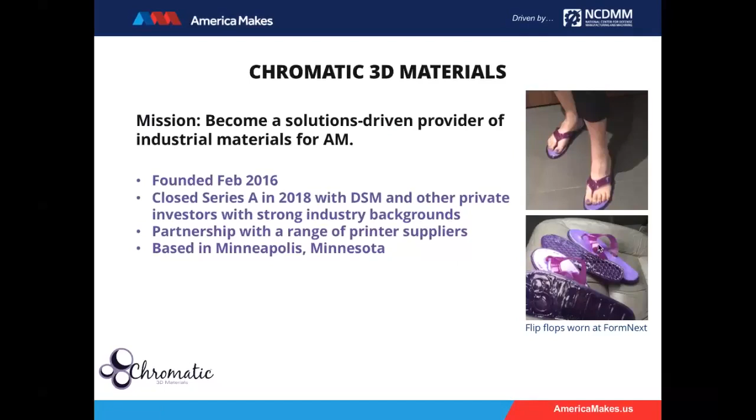We do not make printers, but we have partnerships with a range of printer suppliers, and we're based in Minneapolis, Minnesota. Just to give you a little teaser of some of the things that we can do, on the right you see a photo of some flip-flops that we wore at Formnext just a month ago. These flip-flops were printed with our materials. They are flexible, they're durable. I wore them throughout the conference, and they really have the durability necessary for robust industrial applications, as well as applications like footwear where there's really a demanding mechanical stress that's put on the materials.

So what we're setting out to try to address is what we can call yesterday's 3D printing. And for a variety of reasons, 3D printing has, over the last 20 years, had a lot of brittle materials and a lot of broken parts.

When you look at this from a material science standpoint, there are a couple of reasons for it. One is that the printers themselves are very limited in the number of materials they can handle, so you have a very limited material set with limited materials properties. But also, the manner of printing leads to parts that are more inclined to break, because many printing processes, not all of them, end up leaving voids and gaps in the materials. And these themselves can lead to very brittle, broken parts that impact durability.

So we really wanted to look at this question of how do we make parts that can stand up to the kinds of industrial requirements for standard applications that demand durable materials and durable parts.

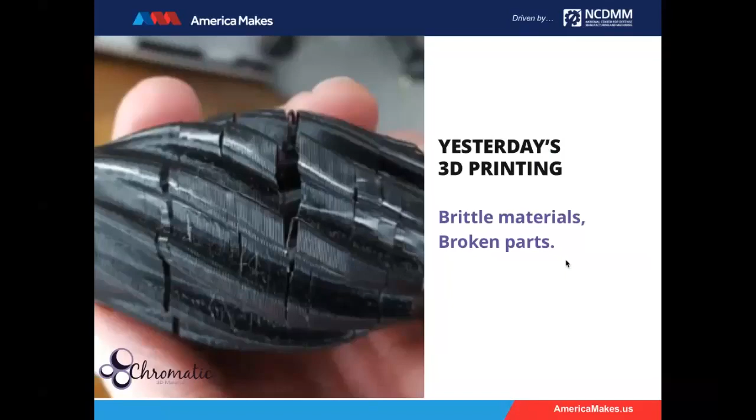So for the older people in the audience, you'll recognize this famous career advice where in the movie The Graduate, Dustin Hoffman is told that he should pursue a career in plastics. And I think this speaks to a lot of things.

First of all, the fact that the plastics industry has a lot of learnings that we can benefit from in the 3D printing industry. It's been around for almost a century now. And really, I followed this advice of following a career in plastics, and it's given me a perspective on why certain materials are chosen for certain applications.

After looking at the 3D printing industry, my conclusion was that this is an industry that really needed a class of materials called thermosets. So the title of the seminar today is about a new class of durable materials. It's a new class to 3D printing, but it's an old class for the materials industry. And that class is thermosets.

So what are thermosets? If you look at any given plastic material that is made, more than 20% of the materials you see are made of thermosets. It's about a $160 billion market in the plastics material sales world. And they're generally selected because they're some of the most durable, most flexible, and most heat-resistant materials. I'll get into a little bit of the reasons for why that is.

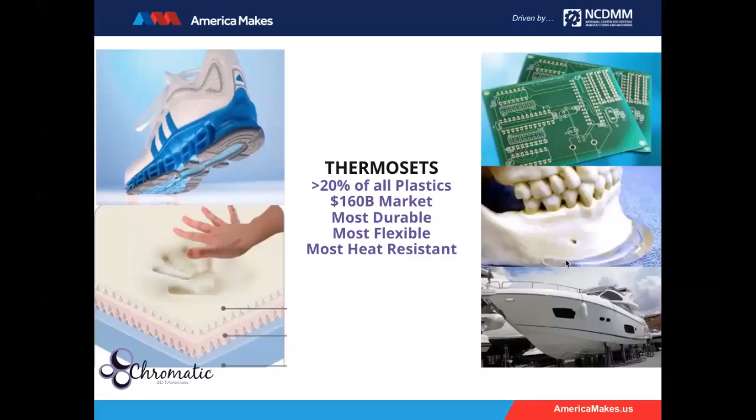But where you find them are in footwear, for one. You find them in foams, in your beds, your mattresses, your seating in your car. You find them on boats. You find them in medical devices, and you find them in electronics. All of these places demand the heat resistance and the durability that a thermoset can offer. And they represent a real broad range of properties as well.

So what are some of the differences, and how are we defining thermosets today? Plastics melt, and the melt flow sets the processing. So you start with a pellet, and you might form a filament, and the filament has a certain property about when it melts and has a certain viscosity, and that really sets its processing from the get-go.

But thermosets actually have a much broader range of properties. And what typically sets the processing rate is the cure rate, so there's chemistry that happens. A typical place where you might see a thermoset is this example on the right.

We have a cartridge dispenser of epoxy, where you have two components that are fed through a mixing nozzle, and that action of mixing causes them to react. What the designers of these materials need to take into account is how fast that reaction is going to happen, and that typically sets the processing parameters.

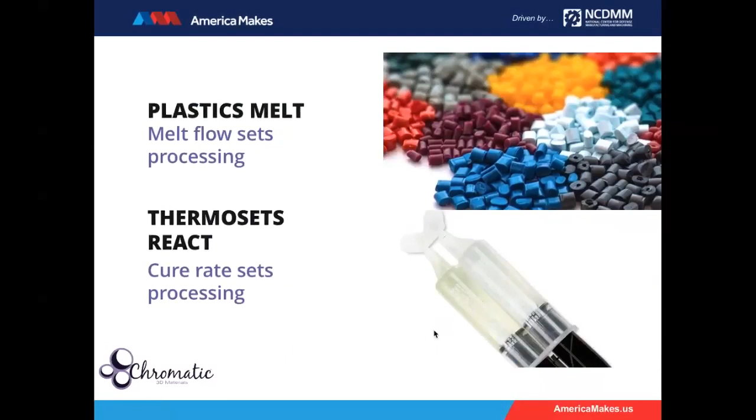Now, photochemistry is a subset of thermosets where light brings that reaction along. But in our case, we're largely focused on materials where simply the act of mixing, sometimes with added temperature, will make that reaction occur.

So let's look a little bit more at how thermosets fit into the traditional plastics market. The reason why this is important to understand from a 3D printing perspective is that as we are trying to bring 3D printing into the industrial market space, our goal should be to understand what materials our customers are using, and how can we offer them the same kinds of materials, the same kinds of options that they use on a daily basis.

So if you look at the plastics market overall, like I mentioned, thermosets, shown here in gray, can be durable, flexible, and rigid, and they're about 21% of the market. Olefins are typically more disposable and comprise about 66% of the market, but they also bring a lot of toughness and very good properties. And then engineering plastics over here on the left comprise rigid materials and materials like nylon, Ultem, acrylics, and TPU.

Now, if you look at today's 3D printing plastics and the palette of materials our customers are used to, 3D printing plastics have barely scratched the surface of the material versatility that our customers are accustomed to. Until this pie is filled out with materials, we won't be able to offer our customers the same properties they expect.

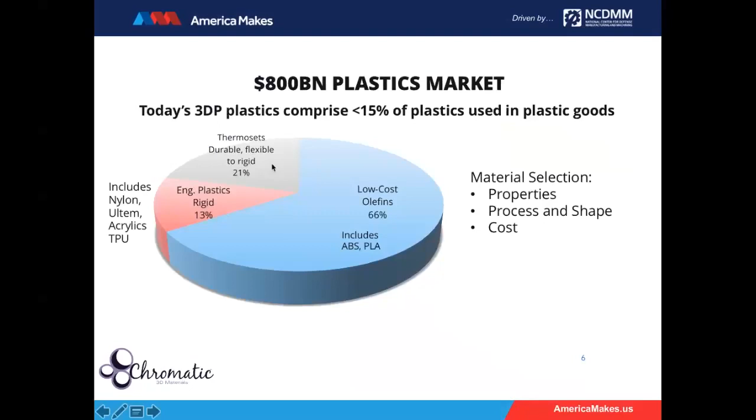So we are simply working on this thermoset material set and looking at how we can deliver this to the industrial market space.

Now, we will focus today on flexible, durable materials. Certainly, thermosets are not confined to flexibles - they can definitely go rigid. But let's take a step back and look at what it takes to make a flexible material.

So I've drawn a cartoon here on the right to show, on the molecular scale, what a flexible material looks like. First of all, they have a rubbery matrix, represented by these gray lines. These are long molecules stringing from one junction point to the next, but they have to be very flexible at the temperature where you want the flexibility.

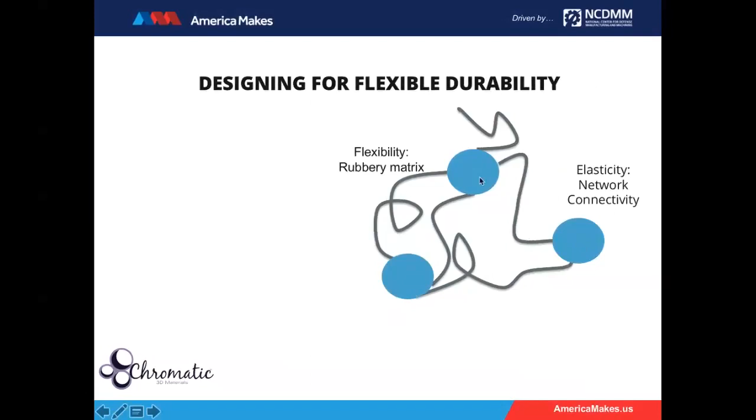The other attribute is that you want some level of elasticity. In other words, if you have a flexible material, you need to be able to bend it and have it come back without a lot of creep. In order to do that, you bring network connectivity - you need some way to bolt those flexible chains down, represented by these blue circles.

And then finally, we want durability. Durability is brought about by how strong those blue circles are, and that depends on junction size. It depends on the strength of the materials that make up the hard segments and the mobility of those hard segments.

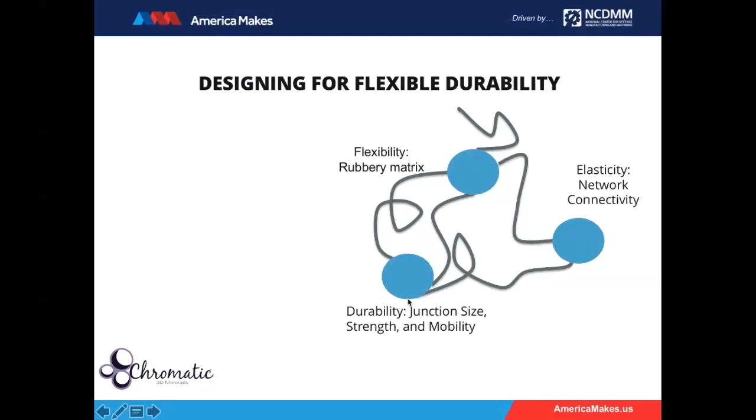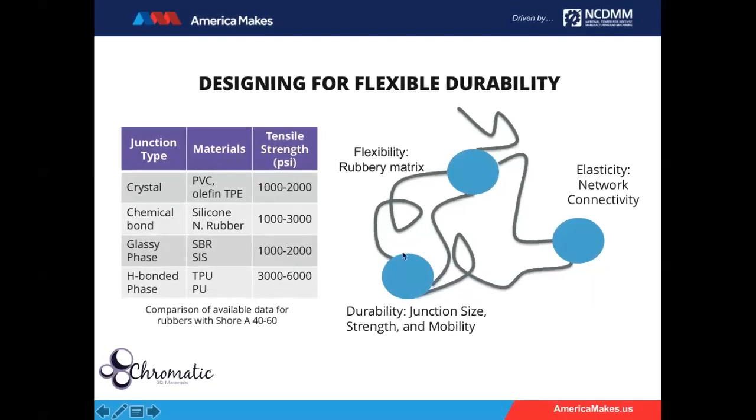So in polyurethanes, they're basically built by having a collection of isocyanates and alcohols that are combined and cured with a little bit of catalyst, and what is formed are these polyurethane networks. You have strong hydrogen bonding wherever one of these isocyanates reacts with a shorter alcohol. That's how you design the materials.

An important thing with polyurethanes is that you'll never find a single clear property for them because they are so versatile. You can change these isocyanates, their reactivity, how UV stable they are. You can change these alcohols to be more or less flexible, more or less susceptible to hydrolysis, and you can change how fast all of these components react with each other. You can also change molecular weights of these respective species. This is why polyurethanes and thermosets generally allow you to access a broad range of materials.

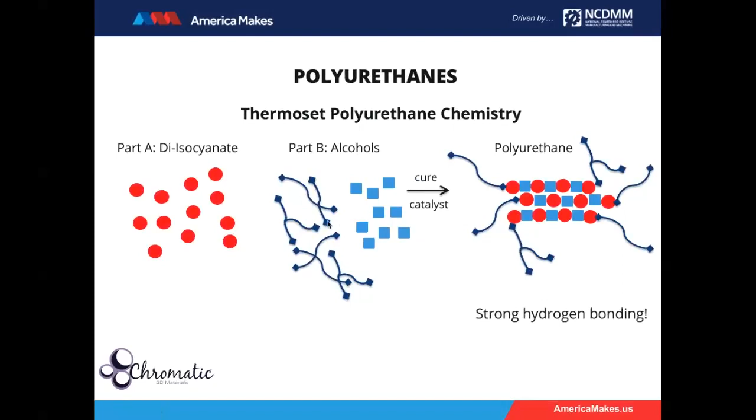So what we're doing at Chromatic is a novel technology that's really just a modification of FDM. What we have is a mixing print head. If you look at this printer here, this happens to be a Hyrel printer.

You have one of those two-component cartridges like we showed for the super glue. A two-component cartridge that holds liquid, and I think that's an important element here—it holds liquid, not a filament. So you have liquid components that feed through a mixing print head, and right here we have a static mixer.

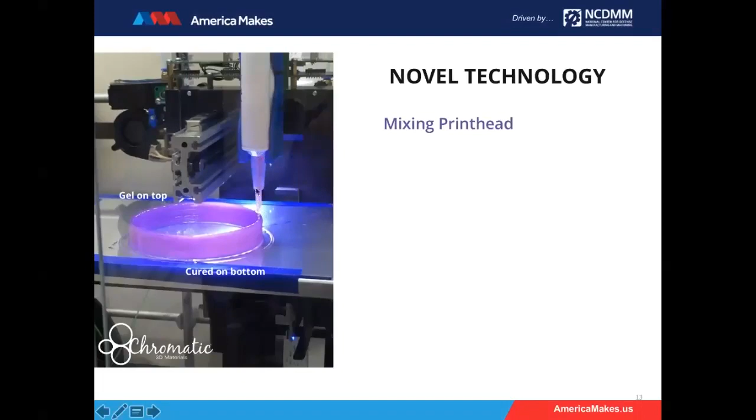That static mixer is about 2 inches long, and in it, as the two components flow through, they start to react. So we have those liquid feeds moving through. The reaction starts in this tip, but by the time it comes out, it's only partially reacted, and the reaction finishes in the part.

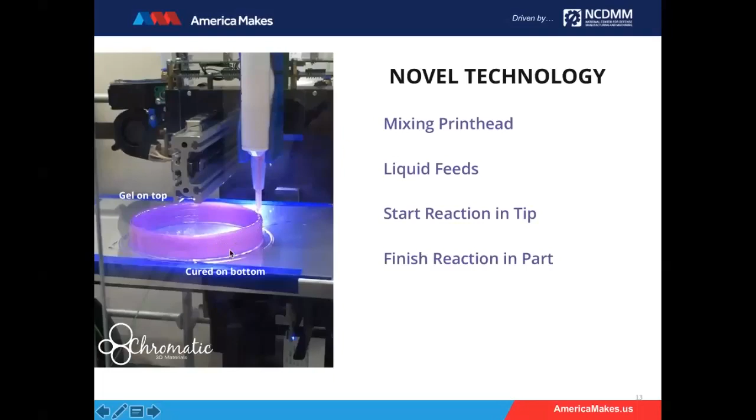If you look at this part that's drawn here, we have a gel on top that's partially reacted, while all the way at the bottom it's more completely reacted. This brings a lot of very important attributes to 3D printing. The first and most important element is that the parts are chemically bonded throughout. It's like we're printing with Gorilla Glue, because as we're laying down each layer, it's chemically bonding to the layer below.

Furthermore, because the material isn't completely reacted when it comes out, it's able to react with the material side by side, and it can also flow slightly to fill any voids that could form in a standard FDM process. The result is that we're able to make printed parts with properties comparable to those of conventional thermosets.

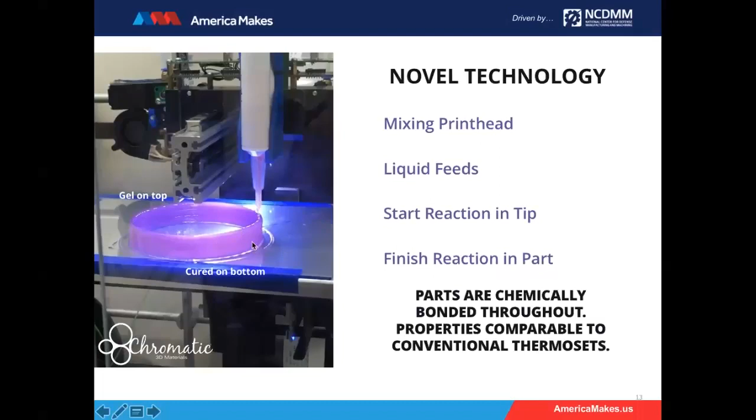The kinds of things we can vary with this are how viscous the material is, how much of a gel it is when it comes out, and how much it's able to react and flow with the materials around it as it comes down to the printing substrate.

So what is special about what we do? If you were to take a standard polyurethane elastomer and place it in these same pieces of equipment, you'll get just a blob. But if we print with our materials, we really customize the viscosity, the cure rate, and the chemistry so that we get a very solid part as it's printing. So we can get well-formed definition that you'd expect from 3D printing.

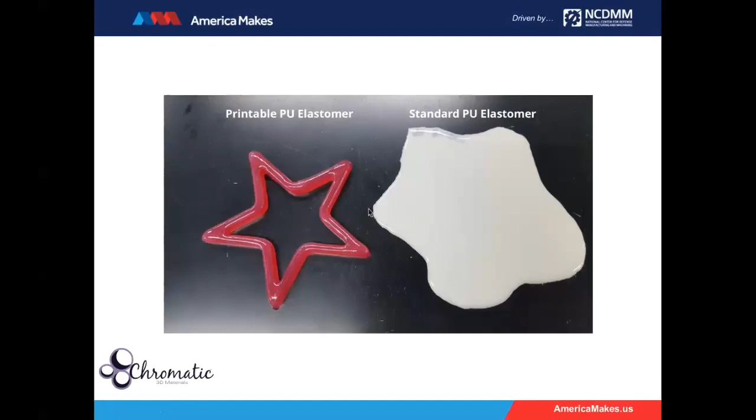Just a little more about how we control printability—it's really not that different from what you see with a filament. If you think about a filament, when it melts the viscosity drops. You have a printing processing window of viscosity where that printing happens, and then as it cools, it hardens to form the shape. This is basically what's happening in FDM.

We know we can adjust the performance of that printing resin by adjusting the temperature of the print head, and we can also adjust the temperature of the print bed. This combination of dials allows us to alter the performance and quality of our print.

With reactive liquid additive manufacturing, we have some different dials, but they affect the same thing. A thermoset starts as a liquid, so it actually starts at a low viscosity, and then as the reaction occurs, the viscosity climbs. This is what we seek to manipulate in order to get the quality of 3D print that we've come to expect of FDM. Now what we do is match the print head design.

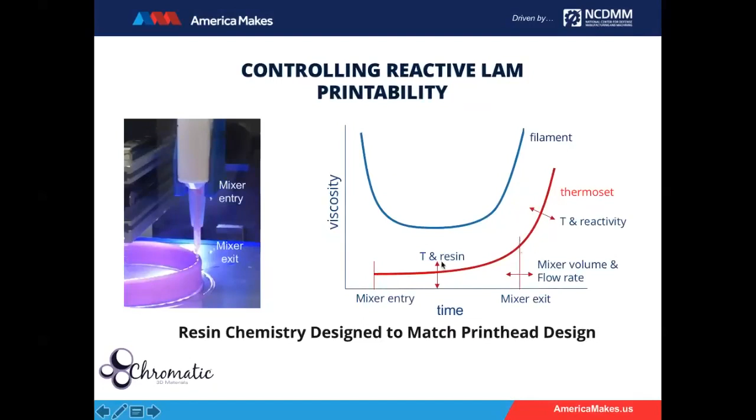So if you think about the viscosity that you might have when the material enters the mixer, and then the viscosity at the point that it exits, where it's just starting its reaction, what we can adjust is the resin chemistry to change how fast that viscosity increases. We can also use temperature, we can use catalyst, and we can also change the size of that mixer volume.

And then when it solidifies onto the part, we can also adjust its performance there with the temperature again, as well as the reactivity. And so what we specialize in at Chromatic 3D Materials is how to design that resin chemistry to match the print head design to get the ultimate performance that's required in the application.

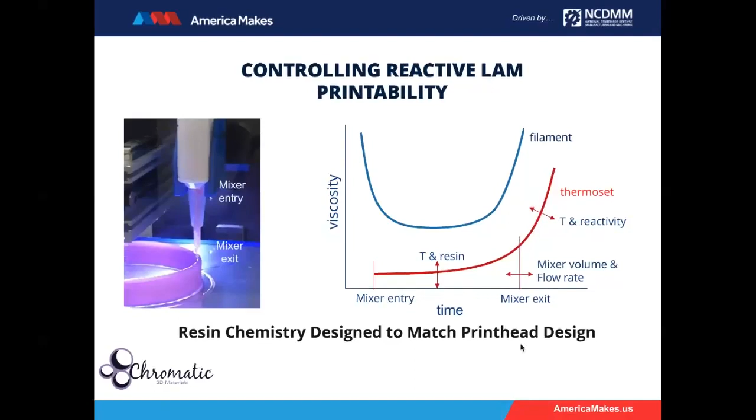Now here, I'm going to show you some of the results that we can get with this. So this is a very simple 3-layer print. It's about a Shore A of 65, so it's pretty flexible, but it's also really strong.

So we've been able to get that same effect, get the same properties that we expect of a polyurethane, where it's flexible, but you can just keep stretching it over and over again. And these materials, these rings will just return right back to their original dimensions after the stress. So we can stress it over and over again, and because we've got that great hydrogen bonding, because we've got great chemical bonds just holding that part together, it's a part that is strong.

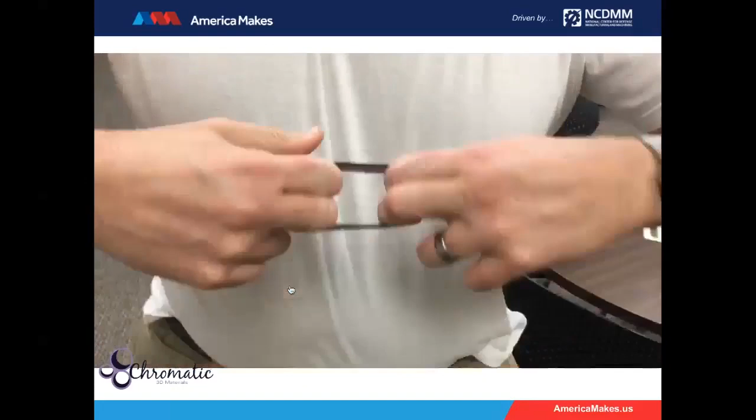And unfortunately, you can't see Dan's face as he stretches these, but he's definitely grimacing and working pretty hard to try to break that piece, and it's a tall task. But it was, as you could see, it was a very thin, flexible piece with strength that was printed.

Now, if you just zoom in a little bit more and look at the parts, you'll also see that if you just compare here on the left, FDM of PLA, you can still see the residual lines. This is an IR spectroscopy through a slice. So you can still see the layer boundaries. And as many people who are experienced with FDM will know, it's very difficult to print with FDM in a way that gets less than 5% porosity.

Now, if you contrast that with the right, what we're able to achieve are no visible layer boundaries and 0% porosity. We've been able to measure the porosity of the parts.

And the reason why this is important when it comes to durability is that voids, and those small voids that we leave behind if the materials don't form a solid part, are actually crack initiators. And so with FDM, even with the most durable resin, if we are leaving voids behind, if we have that porosity, we're making a part that is going to have a greater tendency to form cracks and be less durable.

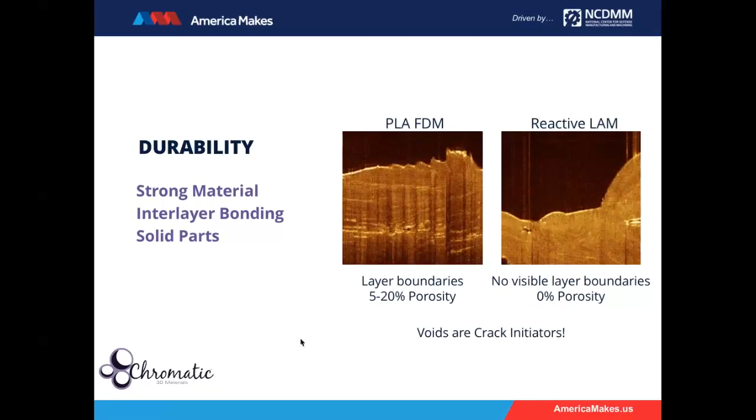Now, like we talked before, there's also a great deal of material versatility. And this brings another element of interesting traits that we can bring to bear in 3D printing. So we can adjust these alcohols and isocyanates and their length in order to vary properties like flexibility. And we can also use conventional low-cost industrial raw materials to do it. So we have the potential of having low-cost materials.

But very importantly, with thermosets, unlike thermoplastics, you can blend two materials in order to achieve intermediate properties. This is very distinct from thermoplastics. If you blend PLA and polystyrene, you don't usually get a material with properties in between the two. If anything, they're usually much, much worse. With a thermoset, when you blend them, you actually get intermediate properties.

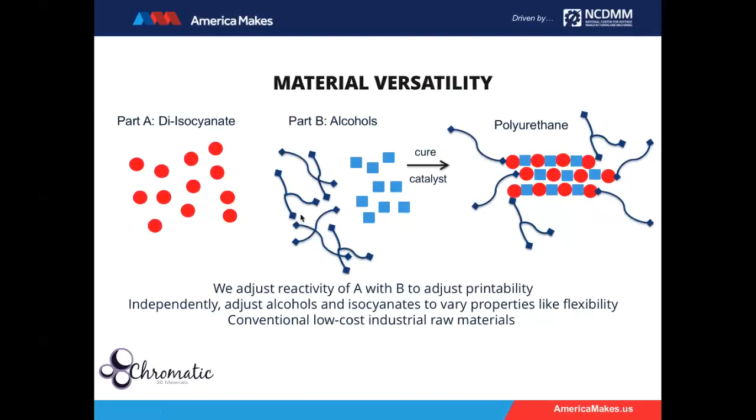So what this means is that in the print head, we can actually adjust the material that we are printing. And so we have won a National Science Foundation grant in order to develop what we call algorithmic materials. So you can get a spectrum of properties and really multi-material parts, also with the durability of the polyurethane.

So just like when you go to the paint store and you're faced with 10,000 paint colors to choose from, and that's coming out of just a very simple system with a limited number of ingredients, we're going to be able to do that in the print head as well and really bring a variety of properties that can adjust on the fly as we print. And that could be color, that could be flexibility, it could be a number of different properties.

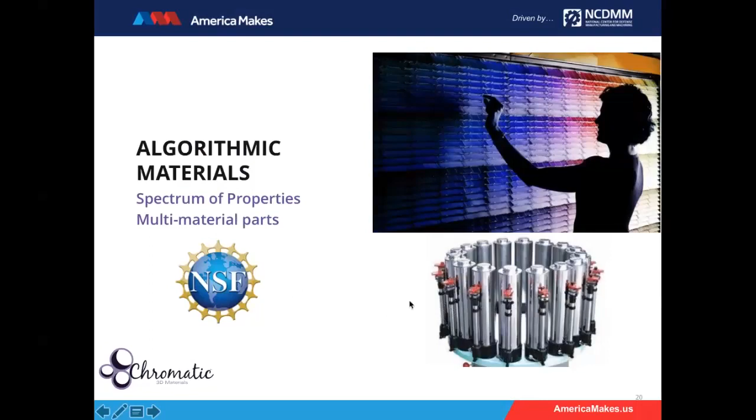So some examples of what we've been able to do here: we have a multi-material star with a soft exterior and a hard center, and it's a fully bonded part so that you cannot pry the two pieces apart.

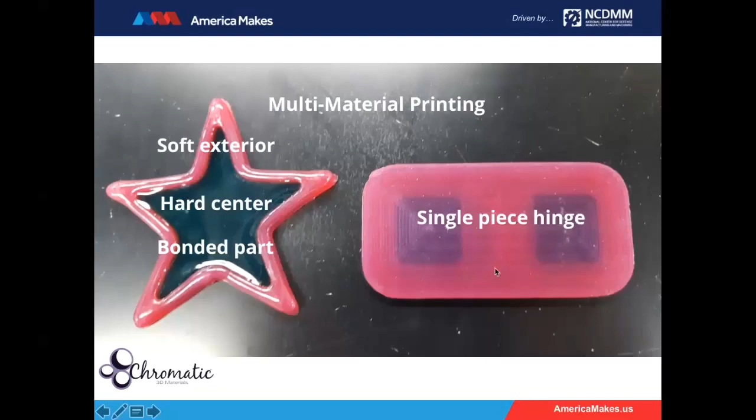We also have a demonstration of a single piece hinge. Here, the dark purple areas are a harder durometer than these pink areas that are softer durometer. That means you're able to print a part that is more likely to flex right in the center, and we can imagine part designs where we're able to reduce fasteners.

This can take 3D printing and industrial applications of 3D printing to a whole other level, where we're able to influence not only geometry design of our parts, but also material design, bringing the strength exactly where you need it and the flexibility exactly where you need it.

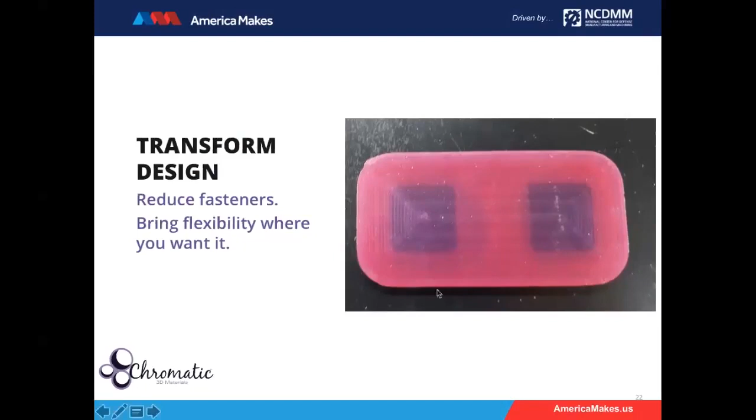Taking this a little further, as I mentioned at the opening, thermosets and polyurethanes could be used to make foams. This is an example where we've got a printed elastomer base with an embedded foam. Here's an example of what that can look like and what kind of design that can make.

So we have a very flexible part, and the foam feels quite soft and comfortable, yet when we pound on it, it's still very strong because that elastomeric network can provide support. This is being able to integrate parts in a way that could only be done with some of the most complex injection molding technology, now brought to bear in 3D printing.

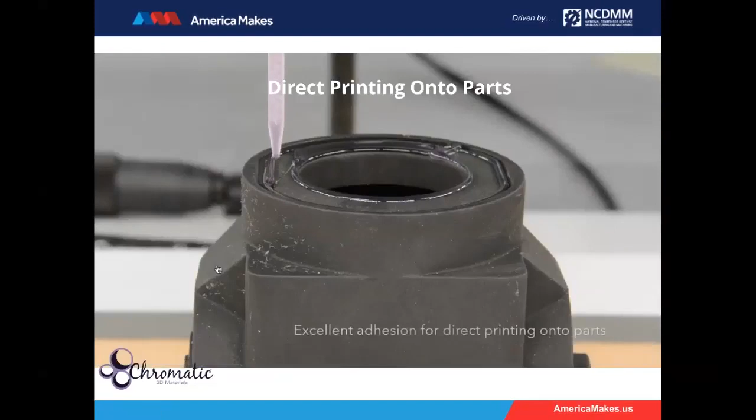Taking this further, another element we can do is directly print onto parts. This becomes important because of two attributes: one is the adhesion of the reacting material allows it to adhere strongly to metal substrates and other plastic substrates, and an important element is that the printing can happen at room temperature.

In this video, we're printing onto an ABS printed part, but because the printing happens at room temperature, we're able to add this elastomeric gasket to the part without fear of melting the ABS. But this could also be done on a metal part.

I believe that this flexibility of the printing method allows you to really open up new designs. You don't need to worry about how to bring these parts into the printer.

So just to summarize our capabilities: we can extend the class of thermosets—we've talked mostly today about polyurethanes, but these same philosophies and design approaches can be used with silicones, epoxies, and foams, and the liquid delivery just brings a lot of versatility to the table.

It brings the ability to bring color, it brings the ability to integrate inorganic fillers. There's just a lot of technology that can be brought to bear to bring material versatility.

I think the material versatility is a hugely important element for our customers, because the industrial users of 3D printing are accustomed to having a selection that is cost-effective but also meets the needs of their particular applications.

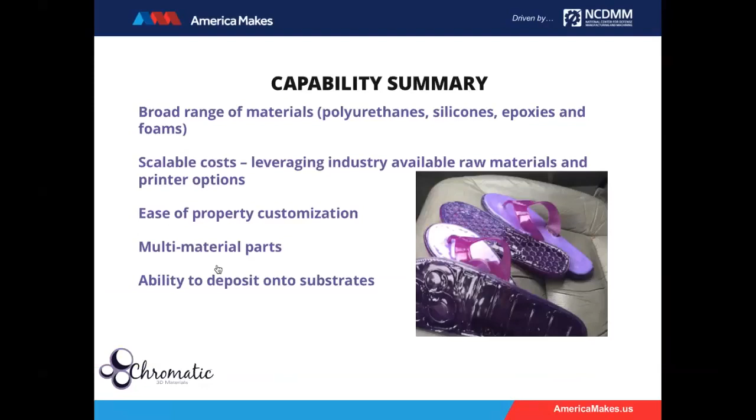So what are some of these printers that we're working with? Well, the list of printers that we are working with is growing steadily.

We've mentioned the Hyrel printer, the German RepRap printer. Structur3D also has a printer where the print head is an attachment on an Ultimaker machine. But also Collider has an interesting printer where you can SLA print a shell and inject a polyurethane.

So we are partnering with these printer companies in order to provide the software and the materials to meet the manufacturer requirements, whatever they may be.

Okay, I see this question about voids initiating cracks. I think I'll address that towards the end, if you don't mind, and I'll talk about that a little bit more.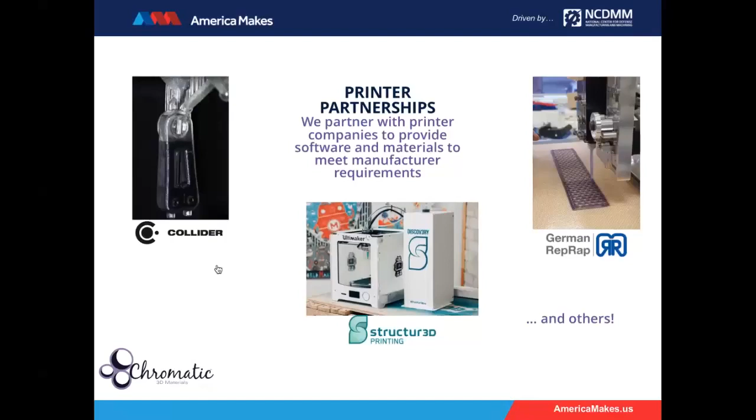By collaborating with these printer companies, we're able to tune our resins to match the capabilities of the printers, but also to meet the needs of our customers, whether they need a smaller print, a higher detail print, or whatever their application requires.

So how are we going about building our business? Really, because we're a small company, we're looking for near-term opportunities. We see huge potential for what we can do with this technology, but we need to take the first steps first. So we're really looking for near-term opportunities where we can implement and get some success, get our materials out in the market as quickly as possible.

We're trying to lever existing chemistry and printing technologies and execute on those opportunities. Then we want to use these opportunities to also continue to build the material capabilities as we go. As we do that, we're able to expand the scope and reach of how this technology can really affect the implementation of 3D printing in industrial settings.

So we're really focused on delivering practical solutions to the customer challenges we face. By having this very specific focus on what a particular customer is trying to achieve, we're able to find the right chemistry and the right printers to satisfy their needs.

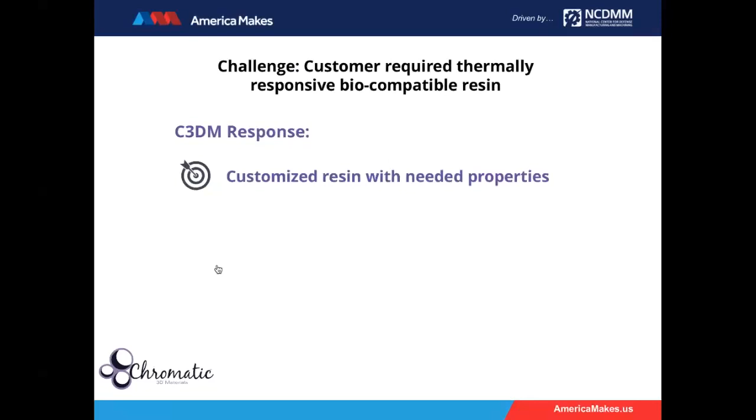Just a couple of examples of where we've been able to implement this. We had one customer who was looking for a thermally responsive, biocompatible resin. First, we customized the resin for those needed properties. You can adjust the performance of urethane elastomer, as well as many other thermosets, in order to change their mechanical properties and their thermal response. So we customized that resin to meet those needs.

We also looked at how we could package the material so that the customer could have a seamless printing effort with minimal waste. In this case, it actually ended up being a cast resin where there were 3D printed molds. So we made sure that our resin was mold friendly, so it could release from the molds easily for ease of manufacturing.

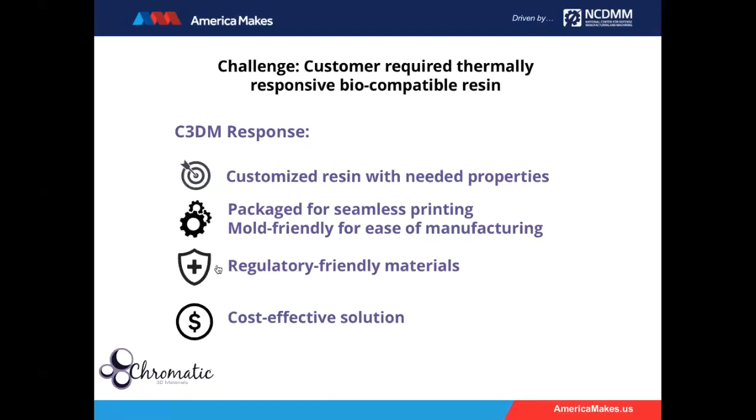Finally, the customer required regulatory friendly materials, and regulation of chemistry is definitely not something to avoid in the early stages. Fortunately, in my experience in the materials industry, we were able to quickly find some regulatory friendly materials that would have the labeling the customer was looking for. And finally, we were able to arrive at a cost-effective solution for them.

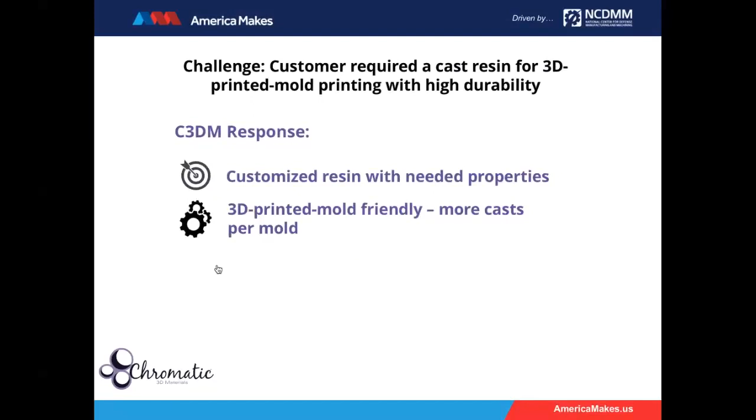In this case, they wanted a cast resin for 3D printed mold printing with high durability. Again, we customized the resin to make sure it met the properties they needed - it needed compression strength in this particular case. We were able to formulate it to be mold friendly, so they could get more casts per mold. Again, we used regulatory friendly materials so the customer didn't have to take extra precautions, and arrived at a cost-effective solution.

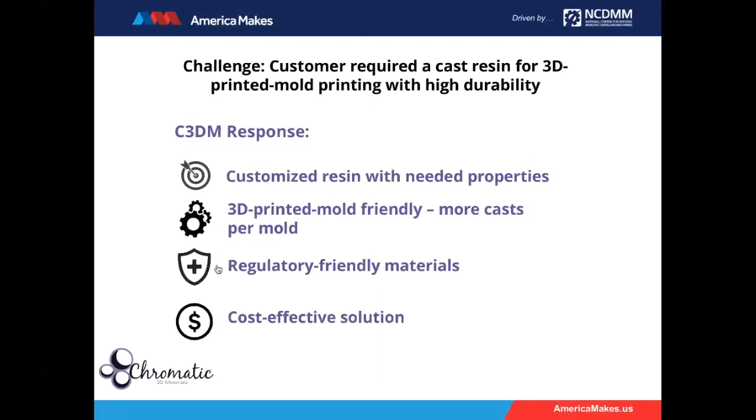In another case, a customer is looking for direct printing on an existing part with personalized features. In this case, they wanted to print on top of a part they already had. This is more active in our portfolio right now - we're developing this as we speak, creating materials that have the right level of resiliency and flexibility that the customer is looking for.

In this case, they wanted a bit of a memory property to the elastomer. And because we're able to do direct printing onto a substrate, we're able to look at direct printing onto the shapes they were looking for.

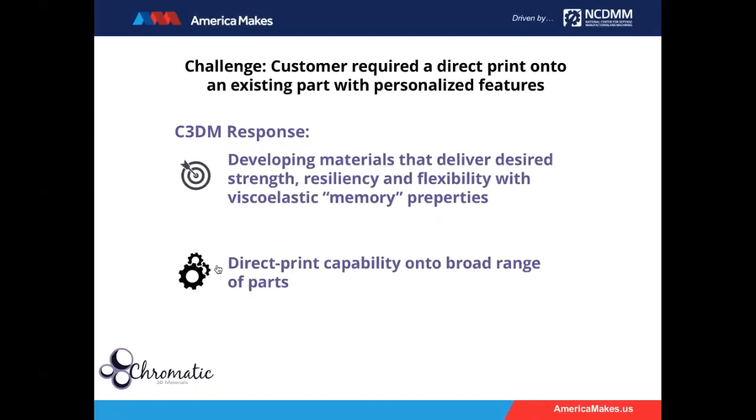Now, there are a lot of technologies out there. We've talked again today mostly about flexible parts, so continuing along those lines, what are some of the choices in flexible materials.

There are cases, frankly, where Stratasys Objet, PolyJet, or Carbon are the better choices. But the cases where we believe Chromatic is really a good solution for a customer to look at, first of all, is flexibility with durability. Carbon resins tend to have a Shore hardness of about Shore A 70 and above, and then they move to silicones. In our case, we're able to move to urethane solutions all the way down to Shore 30. Stratasys Objet printers and PolyJet printers really struggle with some of the durability requirements necessary for these flexible materials.

When it comes to depositing directly on a substrate, we believe reactive liquid additive manufacturing is really the right choice to use, because you can print directly on a whole range of materials without a very sensitive printing environment.

We also discussed material versatility, and this is so essential in many applications, as we're able to adjust the raw materials and make them printable no matter what, for a broad range of versatility that customers are accustomed to.

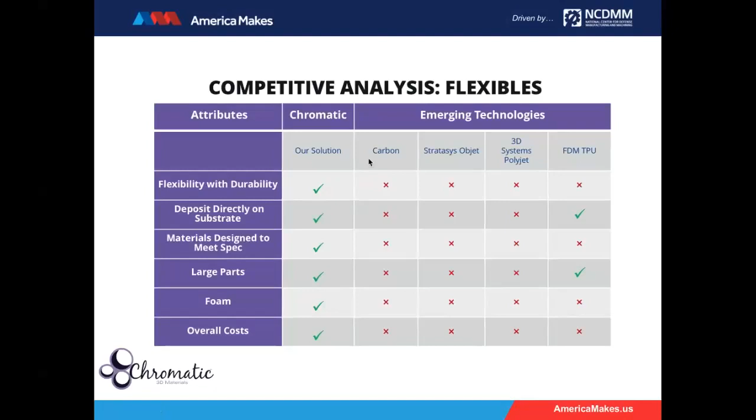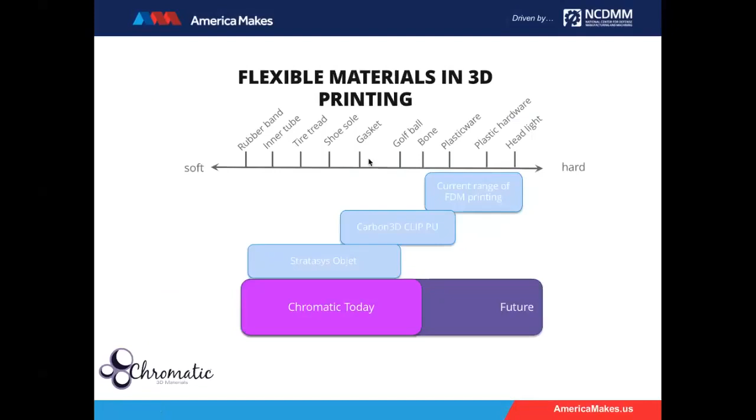This sums up what this flexibility range means. We've talked a lot about shoe soles. The Shore 40 to Shore 60 range is typically found in gaskets, shoe soles, tire treads, golf balls, and inner tubes, and this is where we're focused today—in this flexible range. But as I said, this technology can easily extend to more rigid materials, and we welcome opportunities to explore there. Today, though, we're really focused on this flexible range.

Some applications to consider for this technology are rubber parts. We're especially seeing a lot of interest in making spare parts, as well as being able to direct-print gaskets onto parts. There's a lot of value for spare parts and remote repair—these are a fairly low-cost way to bring production to the site, whether it be a military site or a remote oil and gas platform.

There's also, as we talked about, foam. Soft and rigid foam parts are everywhere—you find them in mattresses, cushioning, vibration dampening, and insulation. We really see that flexibility is so important wherever you have human contact, and that's exactly where we want personalization.

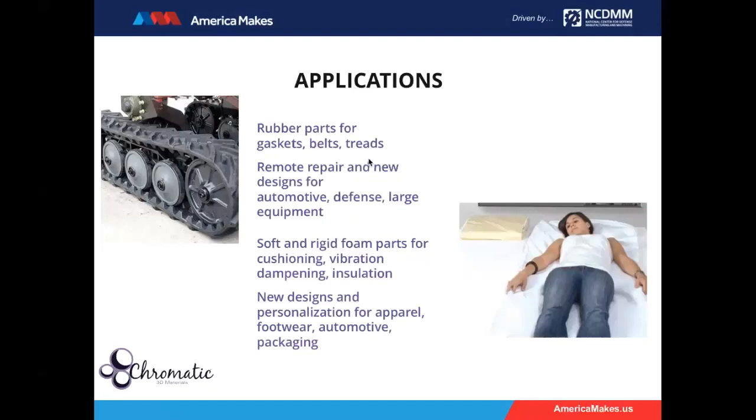And this takes us into footwear, the driving experience in automotive and in the cabin, as well as packaging, where you want particular packaging for specific objects. So we're really excited about where this can go in the future.

We've got a great team, but it's a small one. Today we have 6 people, including myself, but we really strive to choose industry veterans—people who have done a lot in the field of material development and robotics development. Combined, we have more than 135 years of startup and relevant industry experience, so hopefully this means we're making good choices as we move forward.

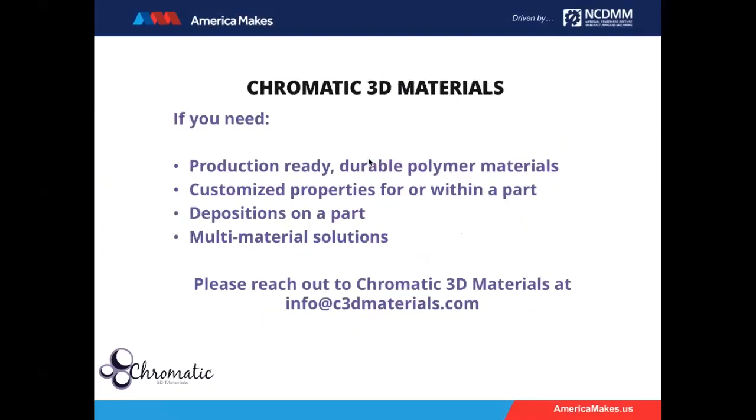So finally, when should you pick up the phone and give us a call? If you're looking for production-ready durable materials, customized properties for a part or within a part, the ability to add to a part, or multi-material solutions, we invite you to reach out to us, and we'll be happy to look at whether our technology can meet your needs. So with that, I thank you for your attention, and I'm happy to answer any questions.

And I think I'll probably start on the void-initiating cracks question, unless, Tiffany, you had any other things you wanted me to pick up right away.

Yeah, no, I just want to say thank you. That was great. I'm really glad that you were able to do this presentation today.